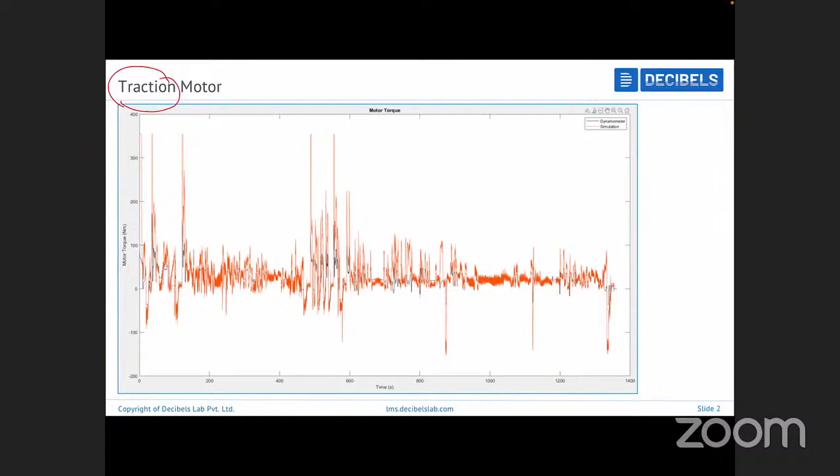Let's begin with the very first topic on the traction motor as a requirement. What exactly is the difference between a traction motor for another application and a traction motor for an EV application? If you take any application of a motor for non-tractive requirements, like industrial drives or automation requirements, the load on the motor is quite static in nature, because you have a predefined load parameter and you just have to know the bandwidth the motor operates in, so you can optimize your motor design for those requirements. But when you take a motor for traction requirements, the motor operates very widely across various regions of operation.

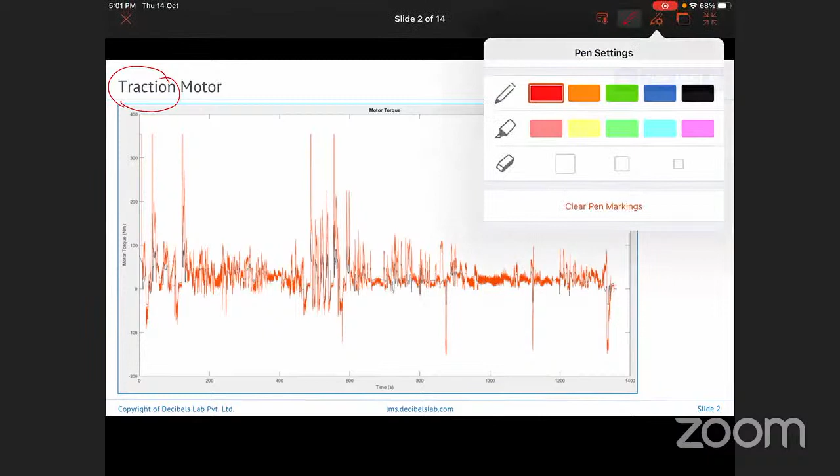Let me draw some lines here showing the motor torque operating regions across the drive cycle. Suppose this was defined for a specific drive cycle, like WLTP, which has been defined for a duration of about 1,300 seconds. In a realistic condition where we drive the vehicle for this many seconds across a specific driving pattern, we observe that from point 0, there's a bandwidth of requirement up to here, where largely the motor is operating. At a slightly higher point, the motor also operates within this torque region, and in some cases within this bandwidth, and at very few requirements, above certain levels.

So majorly, I would say 40% of the time, the motor operates within this torque bandwidth, and possibly another 30% here, which sums up to about 70%. Then another 20% in this region, and maybe about 10% elsewhere. These numbers could be slightly different - I'm just giving a rough example.

What's happening here is the motor torque is continuously varying, and also the motor speed is continuously varying. This is a typical requirement for an automotive application, because if you want to start your vehicle, you need a large amount of torque to move it from static condition, velocity 0, to progress the velocity. Similarly, if you have an overtaking scenario, or an uphill condition, let's draw some scenarios here.

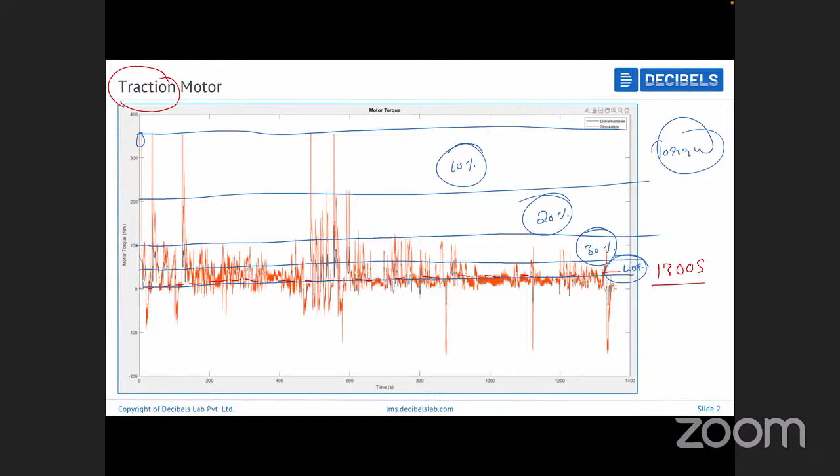So across all these scenarios, the motor needs to be very functional, capable, and efficient in operating at various driving conditions. That's the typical requirement of the motor for tractive requirements. That's why you just can't take a motor, assemble it into the vehicle, and expect it to give good performance output. So motor selection has a lot of procedure in place before you can select any specific motor.

So just moving to the next part of the slide, which is about the options available to choose the motor.

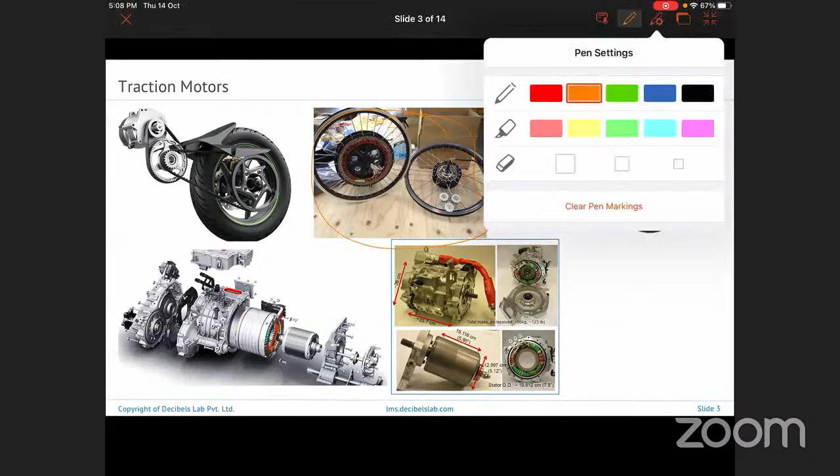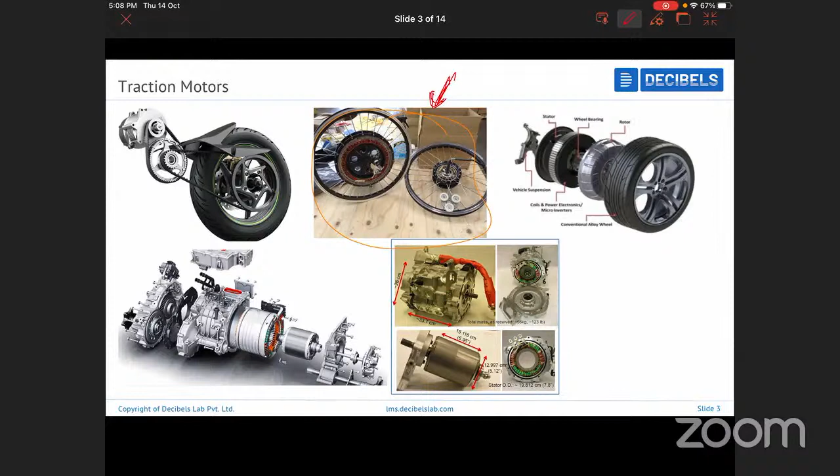If you see real vehicle applications, you have seen a variety of motors for specific requirements. So you have seen a very common application such as a hub motor, where you're trying to package the motor within the wheel itself. That's the typical, very simplistic approach of selecting the motor. But the problem is you have a lot of limitations in terms of the wheel diameter and also the wheel weight. So it's good if you have a hub motor.

A hub motor is one where the motor sits within the wheel itself. So it's completely fine to have a hub motor, but there are some limitations—the limitation being the diameter of the wheel.

And also the limitation is in terms of the weight of the wheel. So these two become quite important parameters when you're trying to implement the motor in the EV application. So what exactly happens inside the wheel if the wheel diameter becomes larger? There are also standard tire sizes available in the market, so you just can't fit any uneven sized tire into the motor.

Also considering the weight of the vehicle, so weight of the tire or weight of the wheel altogether, including tire, motor, and the wheel, that becomes dynamically imbalanced at vehicle dynamic requirements. Let's say you're going at 150 kilometers per hour and you hit a pothole or you hit a bump, then because there's a lot of mass in the moving object, it would definitely undergo a lot of imbalancing scenarios.

So maybe the vehicle itself will vibrate, or the vehicle will lose its path, or anything can happen if you have the wheel which is completely at a high speed and it is hitting a bump. So in that scenario, you would face a lot of vehicle dynamic issue scenarios. So it's in a limited stage.

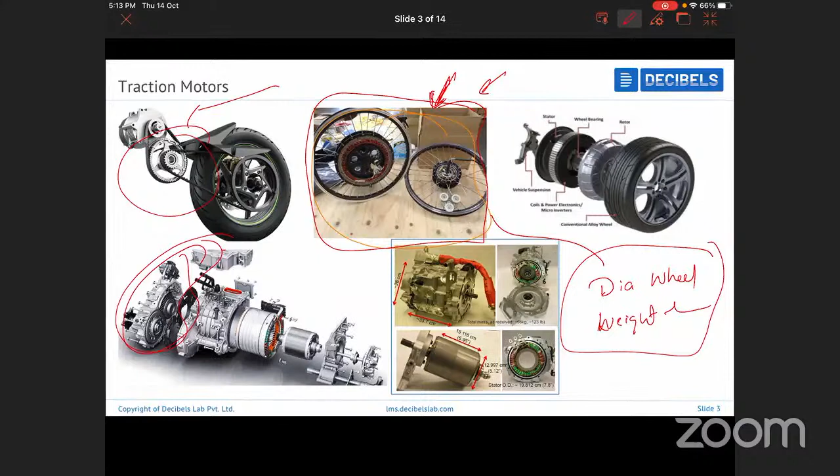So the point of operating points. If you're selecting a motor, there are two ways an OEM will go about designing or selecting a motor. When you have a requirement, you may not have an exact available motor in the market. It's just like if you're going to a shop, you may ask for a specific object that may not be available. Maybe just like going to a carpenter shop and asking him for an exact replica of a specific design—he may not be having it.

But you could either choose one he has, or ask him to manufacture one that you want it to be. It's very expensive when you have to develop your own motors for your own specific applications, because there's a lot of engineering activity. You need a lot of engineers from electromagnetics, motor design, cooling system design, and manufacturing. A lot of these aspects of motor design are required if you develop the motors in-house.

So it's a very cost intensive activity. Keeping that as a scenario, if you cannot go for in-house manufacturing, you have to go for procuring the motor from specific vendors available in the market. If you go for in-house development, you would have better flexibility of designing the motor for a very optimized sizing. But if you have to select a motor from the market, you have like 5 to 6 vendors who have designed specific motors for EV application, and now you want to shop around with those vendors and choose them.

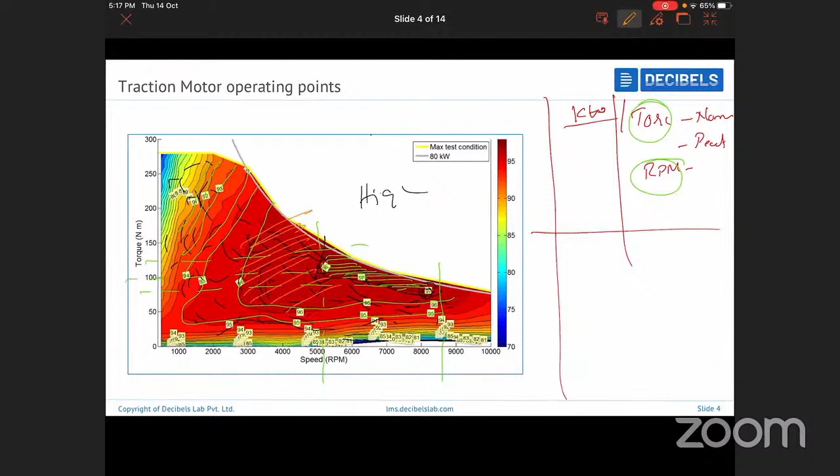It's impossible that you operate the motor always at those operating points, so you have to go for another option of operating points. At this region, you can go for something like this, in this region of operation. Where again, if you cannot achieve that portion, you can go for this portion of the operating point. So the idea is you need to evaluate where the motor operates when running in realistic scenarios.

What is running in realistic scenarios? It's various driving scenarios, like driving on a highway, driving in a city, driving in highly congested traffic, driving in slightly congested traffic, driving on a highway like an autobahn where speeds are really large, or driving on highways where speed is about 80 to 90 kilometers per hour. Various scenarios have been there in realistic conditions.

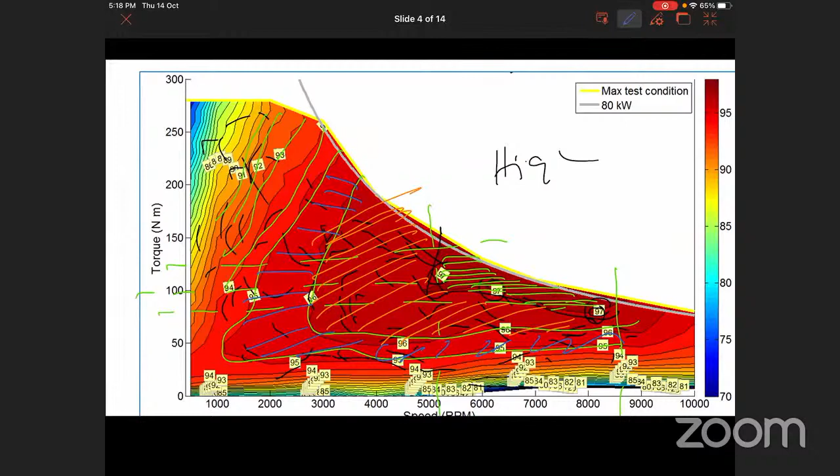Or when you drive a vehicle, you may drive it very aggressively. When your parents drive a vehicle, they may drive it slightly slower. Or if a person is a very experienced driver, he may push the vehicle to the maximum of it. This means the motor RPM and torque has been drastically varying across all these bandwidths. So you want to know, when you run the vehicle across all these life cycle scenarios, where does the motor operate at a very specific point most often.

That's the scope of interest, to study the motor operating points. The more data you have about operating points, along with temperature requirements and all these studies, the more you can optimize the motor design and everything, so it's highly optimal in size.

But when you go for a selection in the market, what you have as an option is you can try to choose a motor that comes closer to your requirements. That's what you could definitely try doing. Otherwise it will be quite expensive to develop your own motor. So you would try, with options like option A, option B, option C, and option D.

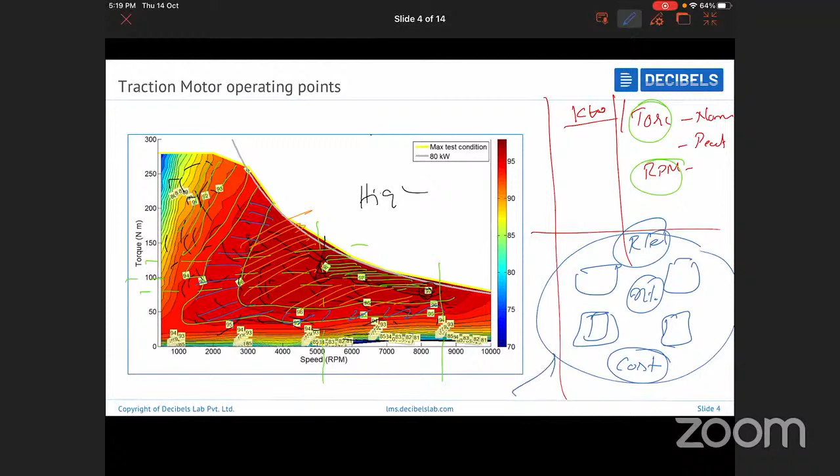You would take care of this whole requirement sheet and then try to match it. Definitely cost is the most important parameter sometimes. Efficiency is also a parameter. Everything like reliability and matching to the operating points, IP requirements of the motor - a lot of other parameters come into picture when we choose a motor for a traction application. So all of that is done when the OEM selects a motor, with a lot of engineers performing simulations to arrive at an optimal requirement sheet, and then you move on to procurement as part of it.

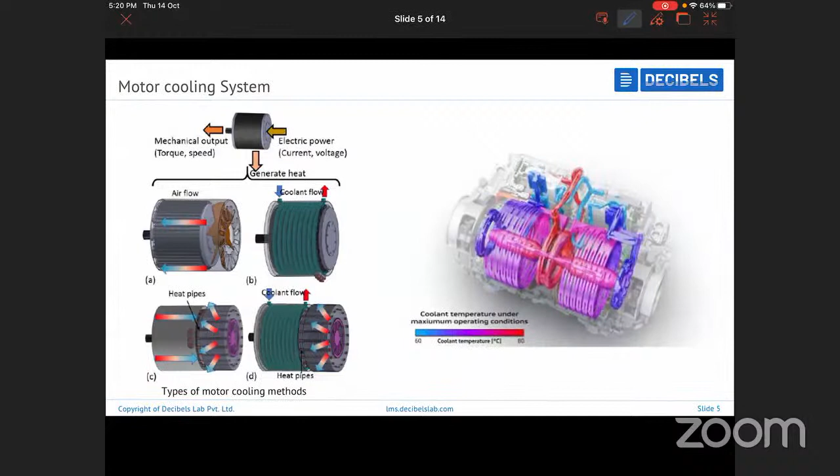Coming to the motor, it's very important to think about motor cooling, because you have efficiency losses in the motor, and that loss in efficiency gets converted into temperature. So you tend to heat the motor, and the motor efficiency depends upon the RPM of the motor, the torque of the motor, and also the temperature of the motor.

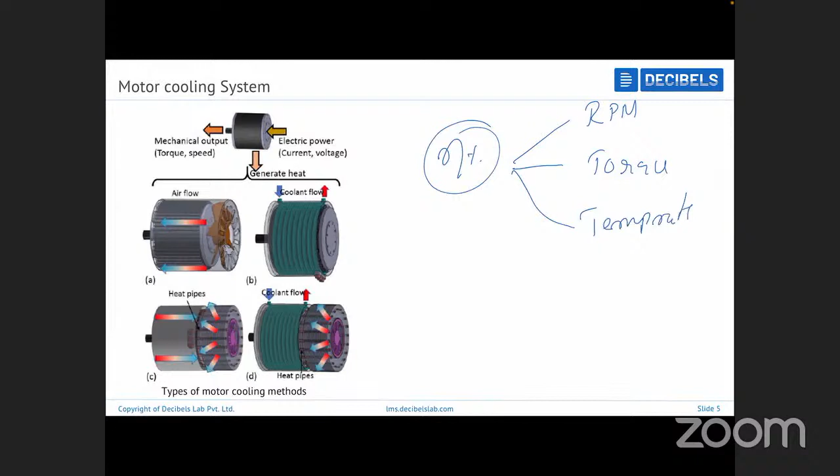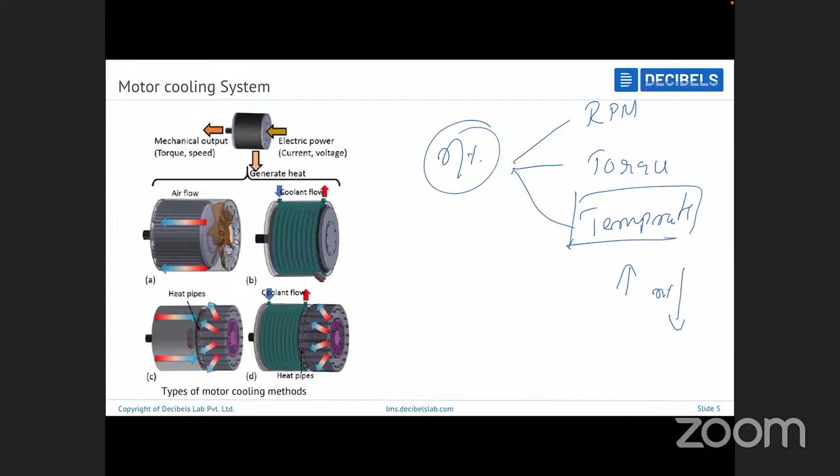If the temperature of the motor goes higher, the efficiency of the motor drops down. So if you do not have an optimal motor cooling system, you would impact the efficiency of the motor. And if you're impacting the efficiency, it means you're drawing more current from the motor controller, then more current from the battery, so you get less mileage. That's the end outcome if you do not have proper motor cooling.

So you could go for air-based cooling, a simple mechanism such as fans and stuff like that. But if you have a very high increase in temperature in a short time, your air cooling system cannot perform efficient cooling, so you'd have to go for liquid cooling approaches in those scenarios. You may also have to understand how the cooling can be done, because you need a refrigeration system that can take care of cooling the coolants. There's a lot of in-depth study that goes into designing motor cooling as an option, but it's quite important.

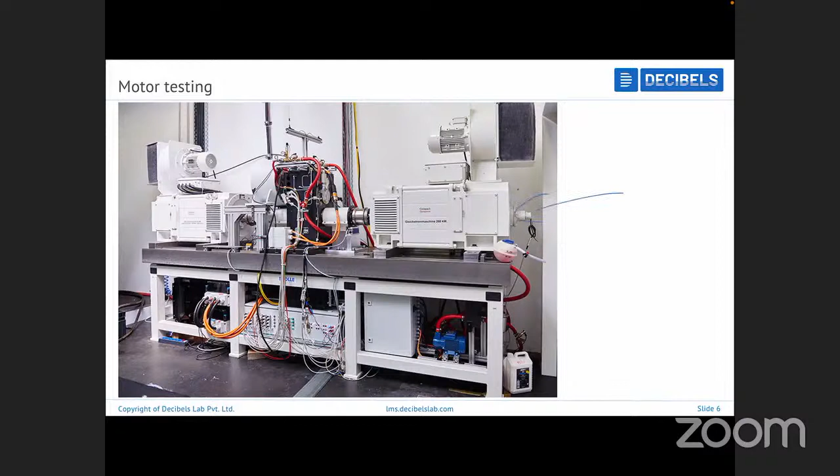So once you've done enough activities of designing and selecting a motor, you also have to test the motor, because in realistic scenarios anything can happen. You have to subject the motor to an enormous bandwidth of operations, duty cycles, load conditions, and abusing scenarios, so you can study the motor temperature, motor behavior, motor performance, and maybe vibration at specific values of torque. A lot of these parameters can be observed when you do motor testing. So a lot of companies definitely take care of motor testing before choosing any motor for any application.

The quite famous motor technologies or configurations people try to use are PMSM - that's the very largely used tech for EV applications today, because of advanced control and density of output you can get from the sized motor. There's also axial flux configuration. Recently, if you've heard about YASA Motors, which is a quite famous company in axial flux motors, they've been acquired by Mercedes-Benz. They've been doing fantastic in terms of optimization in size and weight of the motors. So I bet that technology would be adopted highly in electric cars or electric planes and stuff like that.

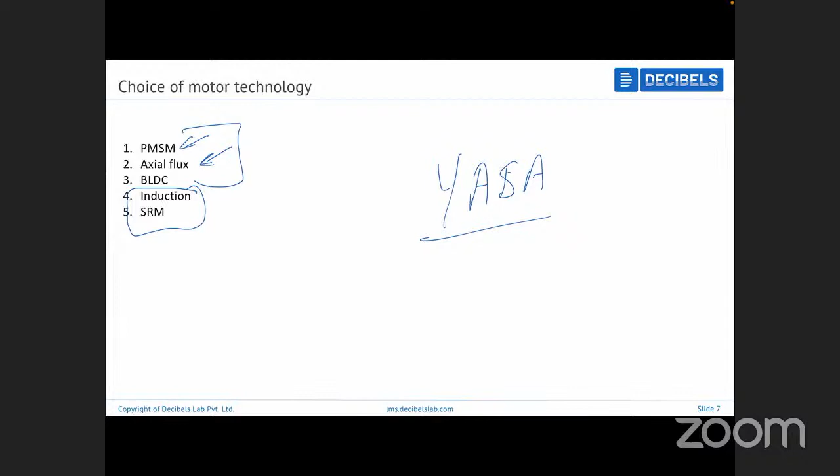So PMSM is currently the leading contender in the market, and axial flux, and BLDC, and you can also see something on the induction motor. Like Tesla was using induction motors before, and now they're moving to PMSM motor configurations, and also SRM motors and things like that, because there's a dependency on magnets in some scenarios, but no dependency on magnets here. So some OEMs and manufacturers would definitely look out for other alternatives, because materials like magnets are rare earth materials, so you may have to be concerned about those components. So yeah, you would go for an induction motor or other SRM switched reluctance motors and stuff like that. That's a very brief overview on motors.

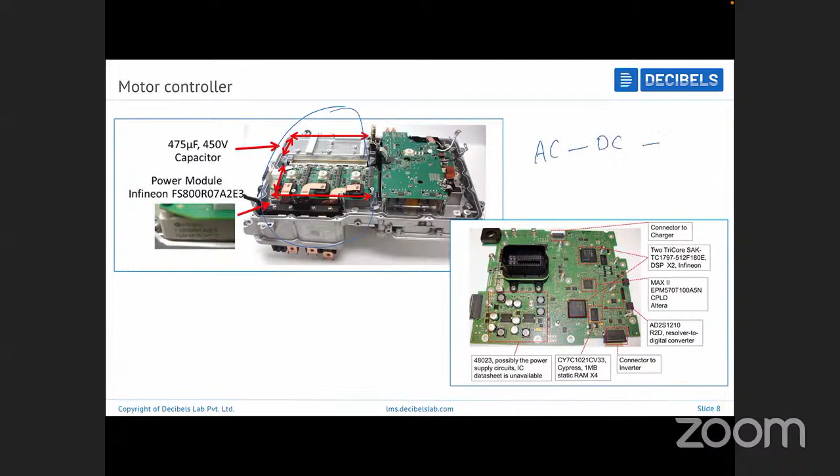Jumping to the area of motor controls, it's similar to what I'd call a battery management system. But here you take care of a lot of power electronics, because it's not just controls. You also have to take care of converting DC to AC, regulating that output, and putting that to the required value to the motor, like how you have in a charger. As we discussed yesterday, you have AC, you need to convert to DC, then regulate the DC and give an output to the battery. Similar way here, because the battery is DC.

Battery is DC, but the motors we use in EV applications are AC motors. So you're supplying DC from the battery pack to a motor controller. You convert the DC to AC, and you take care of regulating the exact amount of current that should flow into the motor. That way you control the torque and RPM of the motor. That's why a lot of power electronics sits in the motor controls, receiving the DC, converting it into AC, and then supplying it to the motor.

Then you have the embedded electronics, state-of-art controllers, maybe FPGAs and things like that. They take care of all the switching requirements and control requirements of the motor, because you have algorithms like speed and torque control, field oriented control, field weakening control, and direct torque control. There are various control strategies and algorithms available that are involved in controlling the motor. Again, there's sensored motor and sensorless configuration, and a lot of approaches through which you get an input reference value and then control the motor output.

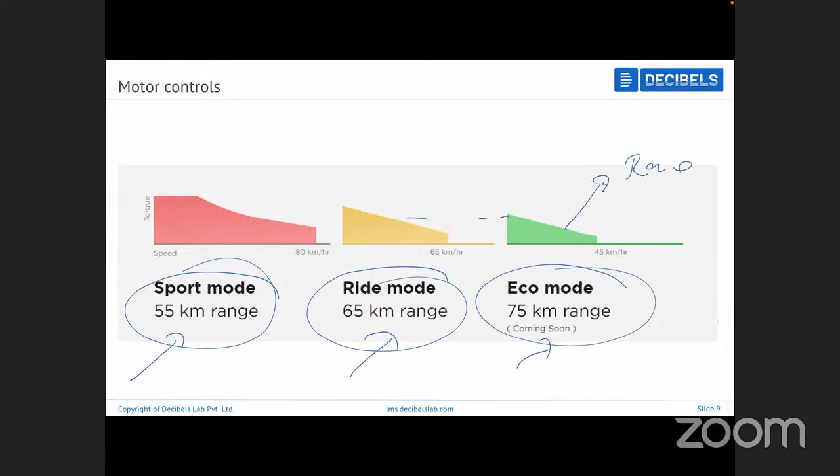This is an image from Ather. You have a sports mode, a ride mode, and an eco mode. Eco mode gives you the highest range because it limits the maximum torque, as you'd see if you draw a line here. The torque is limited in eco, slightly higher in ride mode, and higher in sports mode. This means torque is directly proportional to current draw from the battery. If you draw more torque, you draw more current, and more current means more energy consumed from the battery, giving you a lesser range.

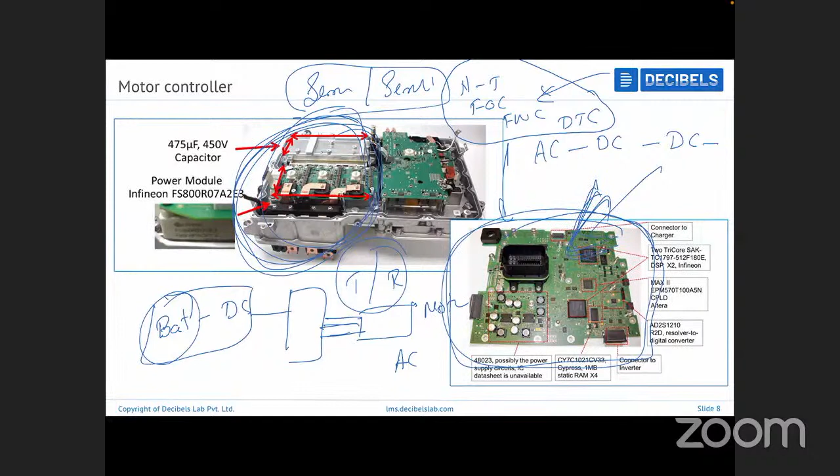All these control modes - all you do as a customer is press a button or touch a screen option saying I want eco mode or sports mode. But in the vehicle, the motor control handles everything, sitting inside this controller. There are different algorithms and limitations set in the motor, so that in eco mode, the motor doesn't draw more than a specific current value. All this state-of-art logic sits inside the motor controls.

Another example is hill assist control. If you've parked your car on a slightly inclined road, the vehicle tends to roll back when you lift off the brake, and you might hit the person or vehicle behind you. The control algorithm you can design is such that if the vehicle speed is at a certain value, the vehicle won't move back if it's in a drive condition.

So you have some of these algorithms sitting inside the motor controller. The motor controller assists the driver so the vehicle doesn't go back. That's very comfortable for the customer, because if you've driven cars around on hilly roads, you have traffic lights on an uphill condition. You're parked at a traffic light on an uphill condition, the signal turns green, everybody's honking behind you, you let the brake go off, and the vehicle starts to move backside, right?

Even when I was learning to drive, it was a very scary scenario. So that's something you need to be concerned about, and these are all control algorithms that you can actually implement in the motor controls to take care of that scenario and assist the driver.

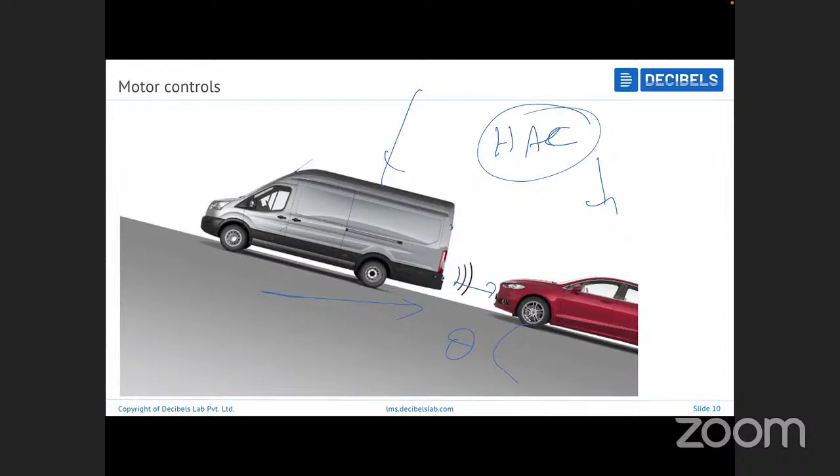At Decibels, we have been opening up courses on designing embedded hardware, where you can use design software like KiCad to design these motor controllers, and you can also manufacture them, test them, and run them. We've been teaching learners how to design a motor control for sensored applications and sensorless applications, as required in the industry.

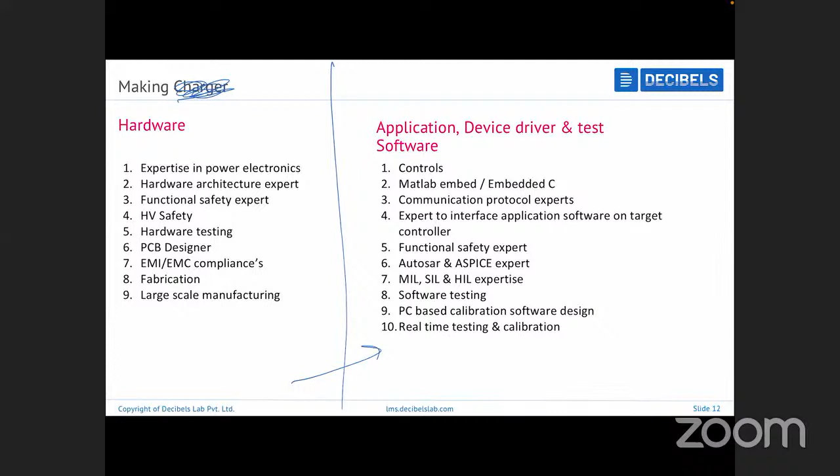On the software side, you need a similar set of requirements as what you'd use designing a BMS or a charger. You can use the same skill sets in designing motor controls, but you'd need subject matter expertise on motors, because you need to know the application end for EV, how it behaves, what dynamics are there, and what scenarios realistically come up in EV applications. So you need exposure to motors and EV application and controls as part of it, but the rest is typically a similar overview.

That's pretty much it from my side for today's session covering motors and motor controls - quite an overview, I totally agree. It's not possible to teach you the in-depth of motor controls, like Clarke and Park transformations or other such details, but we have courses that can definitely help you engage and learn at Decibels Lab.